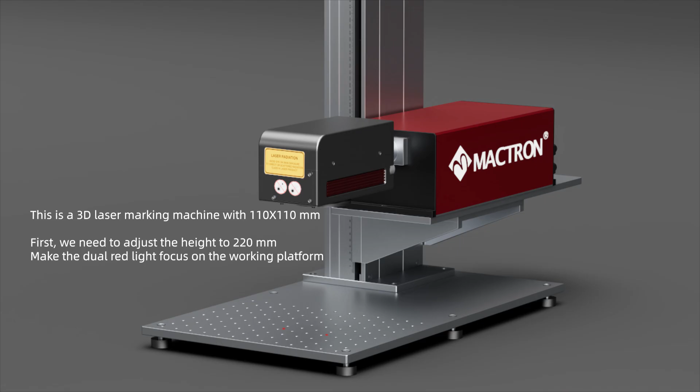1. The focal length setting of the 3D marking machine, and the model position setting in the 3D software. This is a 3D laser marking machine with 110 multiplied by 110 millimeters. First, we need to adjust the height to 220 millimeters. Make the dual red light focus on the working platform.

At this time, the marking format is 110 multiplied by 110 millimeters. The curved surface processing height range is 0 to 40 millimeters. Next, we will learn how to adjust focus and set the software in two situations.

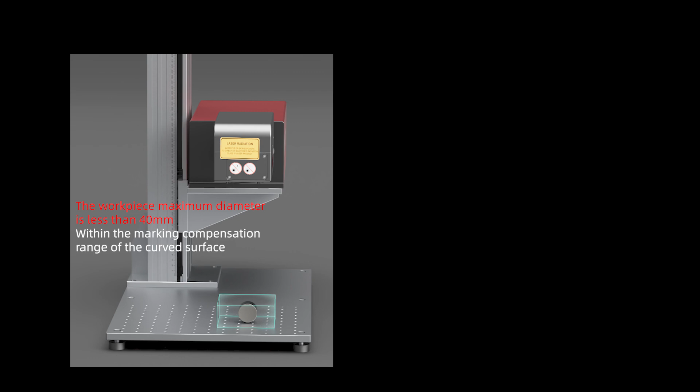The workpiece maximum diameter is less than 40 millimeters, within the marking compensation range of the curved surface. The workpiece maximum diameter is more than 40 millimeters, beyond the marking compensation range of the curved surface.

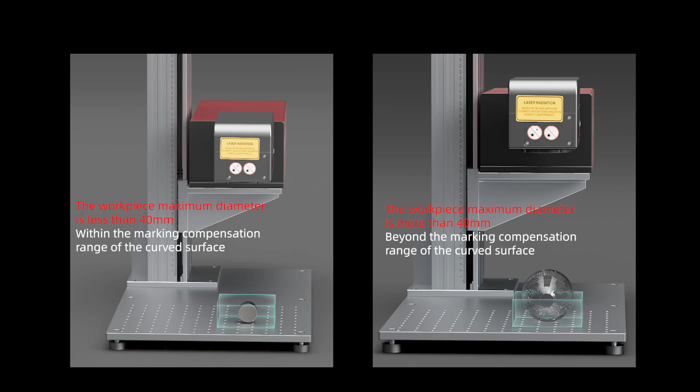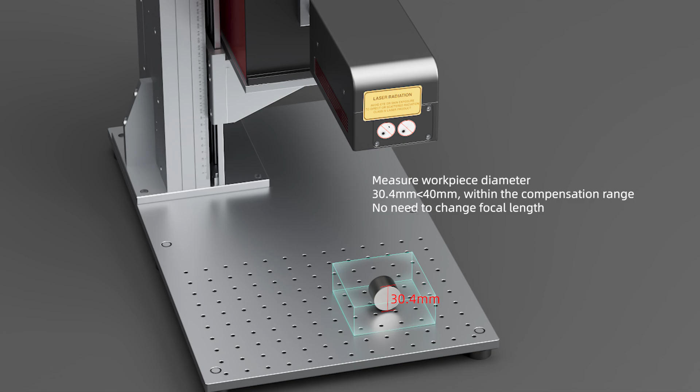The workpiece maximum diameter is less than 40 millimeters. Measure workpiece diameter. 30.4 millimeters, less than 40 millimeters, within the compensation range. No need to change focal length. Open software. Switch to 3D view.

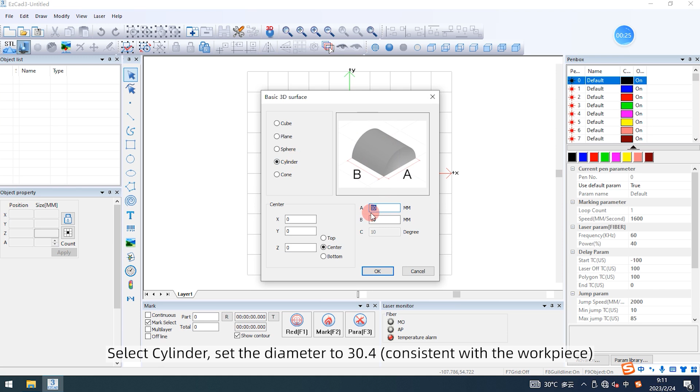Create model. Select cylinder. Set the diameter to 30.4, consistent with the workpiece. Press and hold Alt plus left mouse button to adjust the viewing angle.

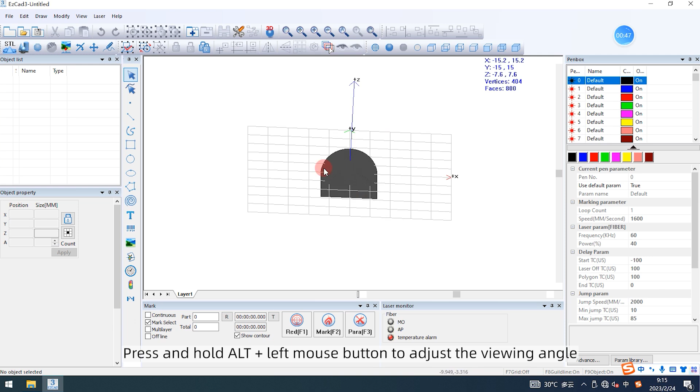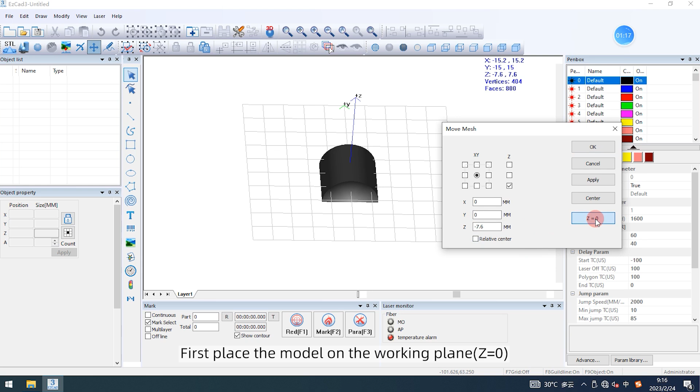First, place the model on the working plane, Z equals 0. Then set the Z-axis to 30.4 and apply.

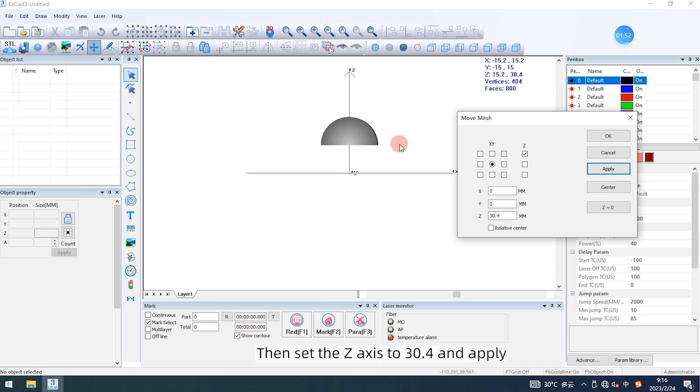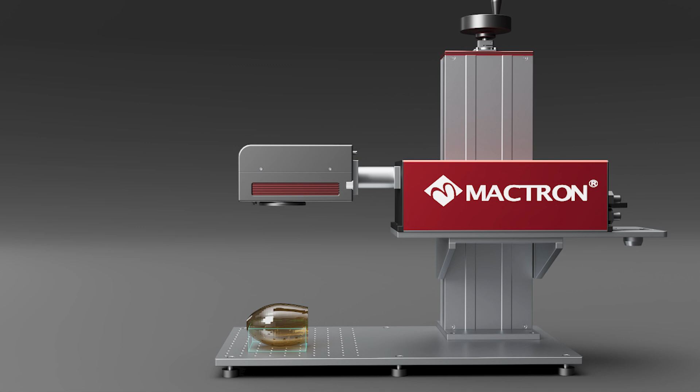Keep the model setting height, Z-axis, consistent with the actual workpiece. The workpiece maximum diameter is more than 40 millimeters. When the workpiece is over 40 millimeters, we can see the marking area is not within the marking compensation range of the curved surface. We need to readjust the focal length.

Measure the workpiece diameter: 79 millimeters, beyond the compensation range. 79 minus 40 equals 39 millimeters. Move the focal length by 39 millimeters on the basis of 220 millimeters. Make sure the compensation area can cover the marking area.

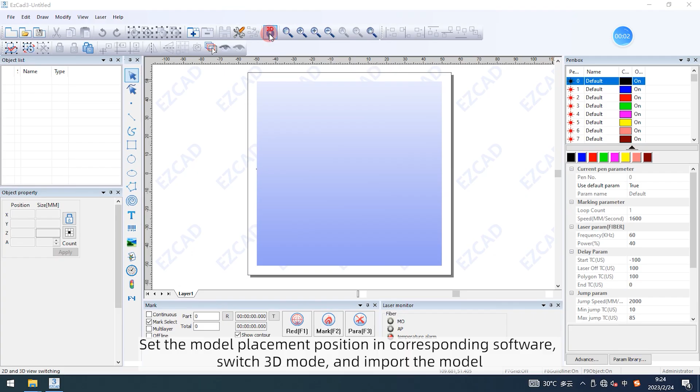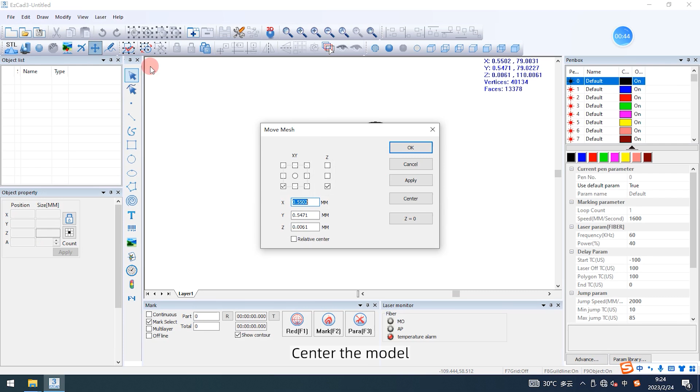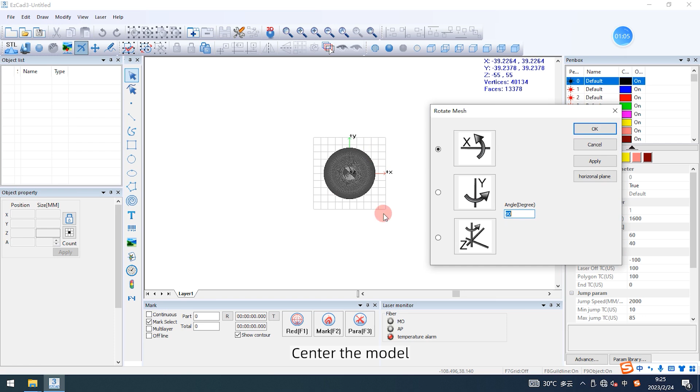Set the model placement position in the corresponding software: switch to 3D mode, and import the model. Center the model. Adjust the model placement direction to be consistent with the actual placement direction.

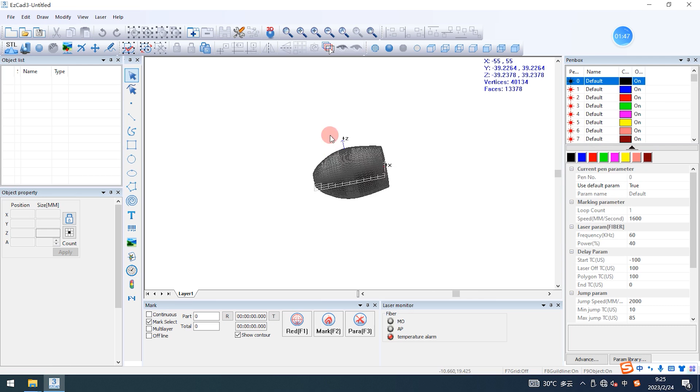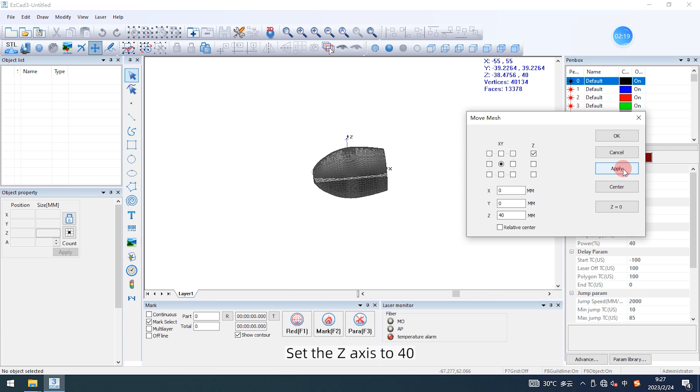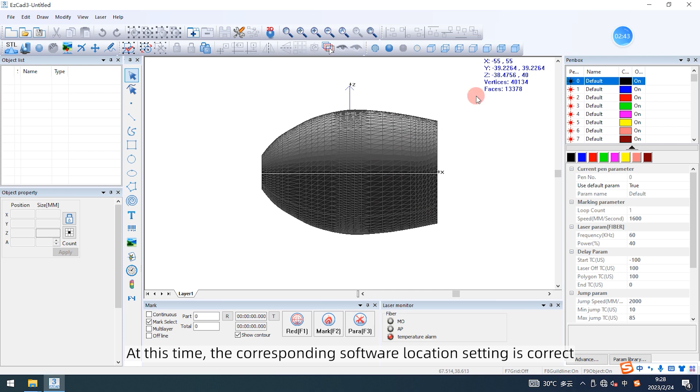Set the Z-axis to 40. Make the marking compensation position in the software the same as the workpiece. At this time, the corresponding software location setting is correct.

2. Workpiece placement. The placement of the workpiece must be consistent with that in the software, level with the work platform. It can be fixed with a fixed bar or custom fixtures.